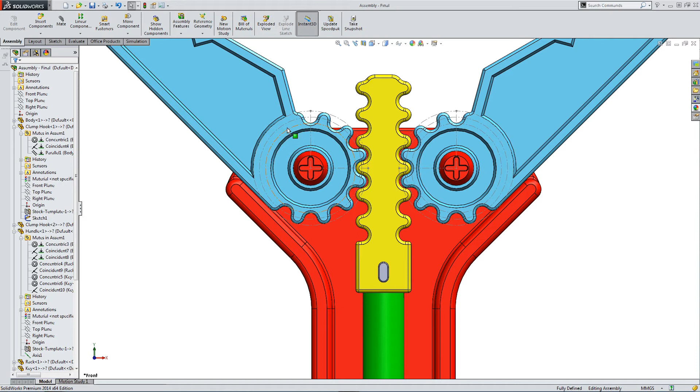On these clamp sections I've added some guideline sketches. These sketches are actually in the individual parts, so let's have a look. Here is my clamp part and here is my sketch.

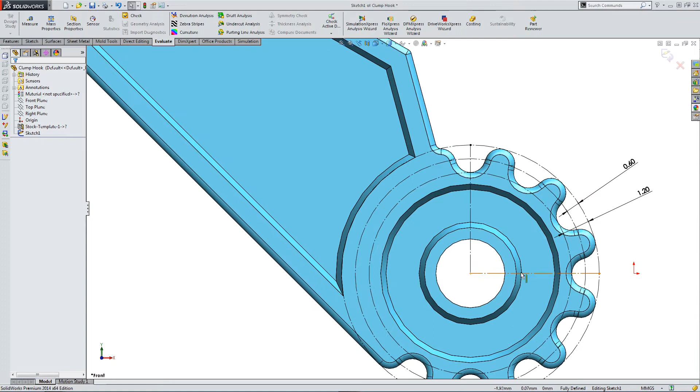I have a tooth profile and I want to track it, so I've aligned circles to the inner and outer section of the tooth profile, and tracked the mid-plane. Now it's the middle circle I'm interested in, because I'm going to put together a rack and pinion mate. The middle circle is 10 millimeters in diameter.

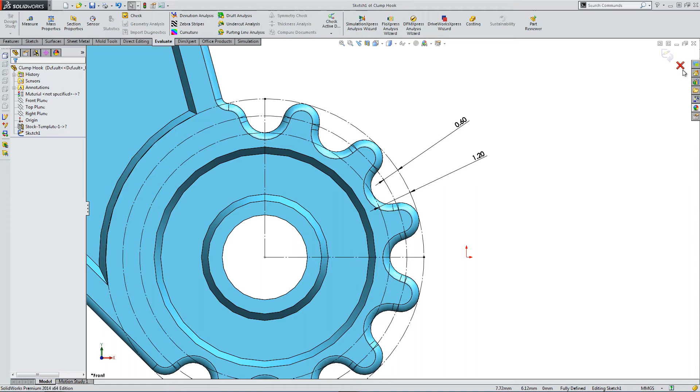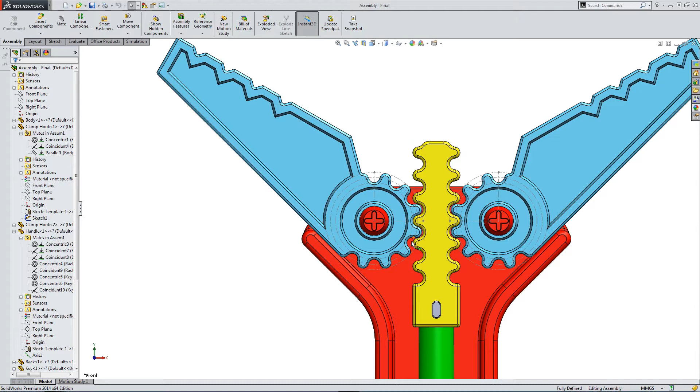I'd like to put together this rack and pinion mate, but before I do so I need to turn off one of my other existing mates. As previously said, all the parts are fully constrained, so I need to deactivate one of these three constraints. In the clamp hook I need to get rid of the parallel body mate.

This is just matching the cog to its hard stop position. I need to do this for both hooks, so let's turn the parallel mate off for the other hook as well. Okay, so now both are movable.

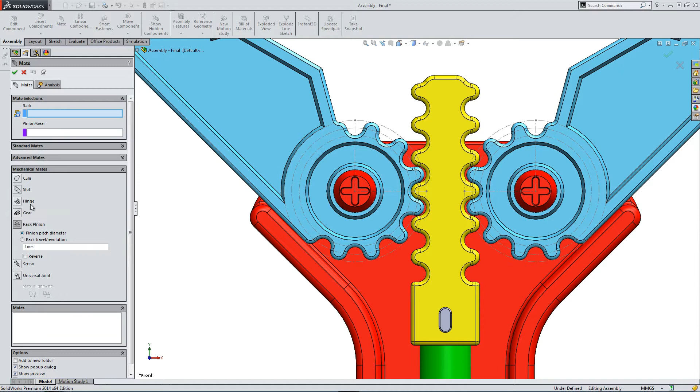Let's replace this with a rack and pinion mate. We're going into mechanical mates, then rack and pinion, and we need to select a rack and a pinion. For the rack, I'm just going to pick this line, this edge from my rack.

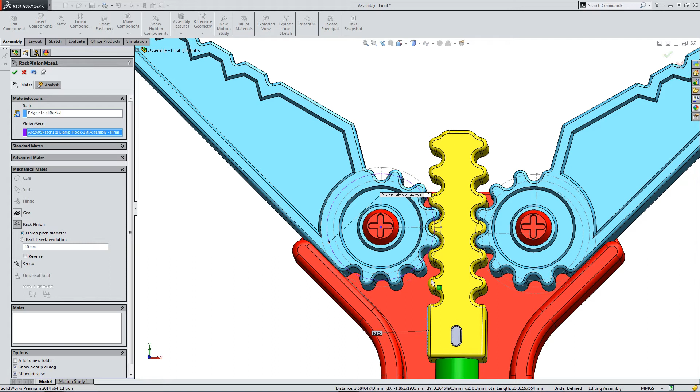Now for the gear, it's very important that I select that middle circle, the 10 millimeter diameter circle, because the tooth profile from both parts are matched together, and it's this circle that guides the pitch. So let's accept this.

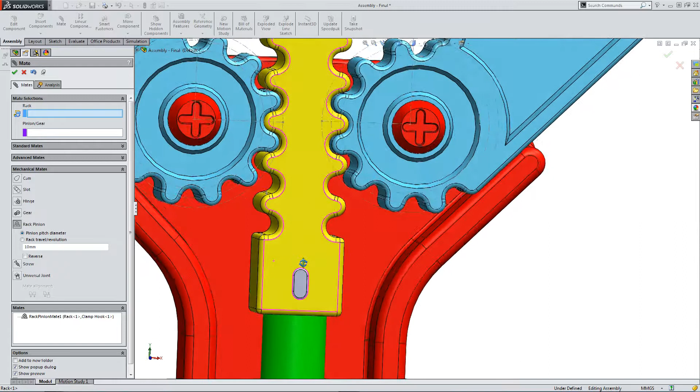I need to do it again for the other side. I'm unsure at the moment whether I need to select the same line, but for trial and error purposes I'm just going to select the opposite, and then select the same circle. This may or may not work when we come to animate it later on. We'll find out, but we can easily trial it and then modify the mate if it doesn't quite work out.

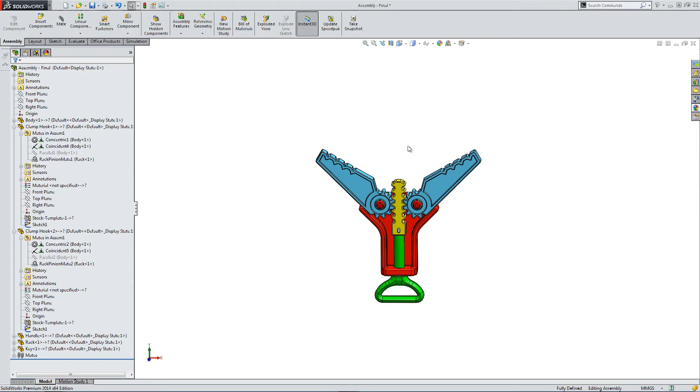Okay, so I now need to have a look at my front plane. I constrained my body to the front plane before. So if I do a section view by the front plane, I can see that it intersects perfectly through the diameter of the handle.

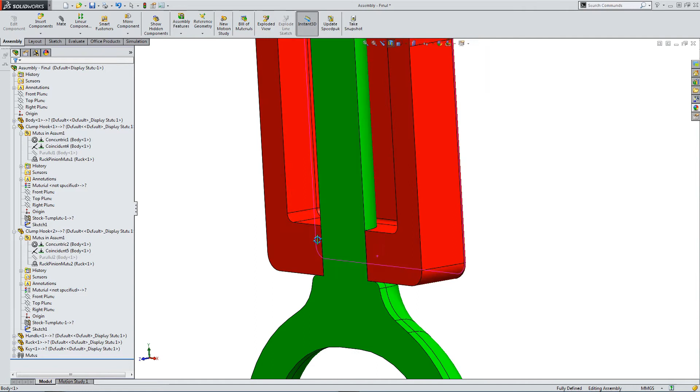I did this on purpose because I now want to create a spring on this plane. This is going to be an interactive spring that works within this assembly, so I don't want to start a sketch. What I want to do is insert a new part.

So let's go Assembly, Insert Components, New Part, and a part will have appeared. See, Part 1 - let's rename it Spring. Now I want to edit this part because I want to add some function to it.

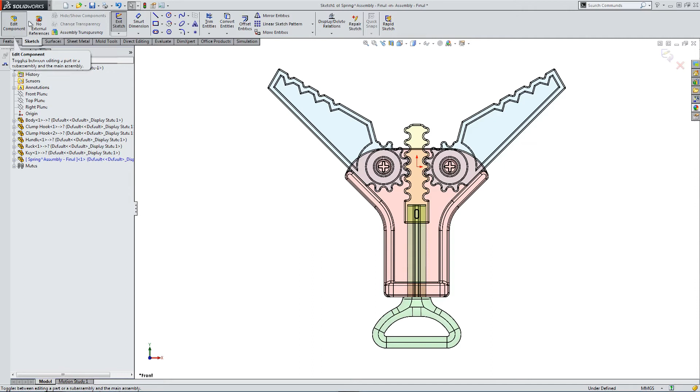I'm going to draw on the front plane within the assembly. Let's bring up an axis to work with. So what I'm doing here is modeling my part, which I would usually do externally, within the actual assembly file, because there's geometry that I want to track in the assembly file.

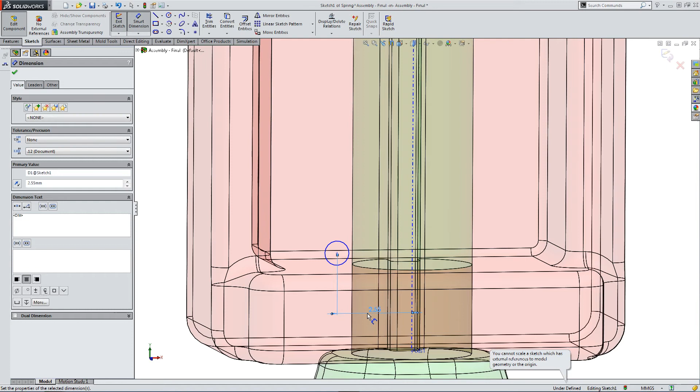Let's just add some constraints for a sketch. I'm going to basically put together the profile for the spring, so this is going to be the start point for the spring. It'll become a little clearer pretty soon why I'm mapping it out like this.

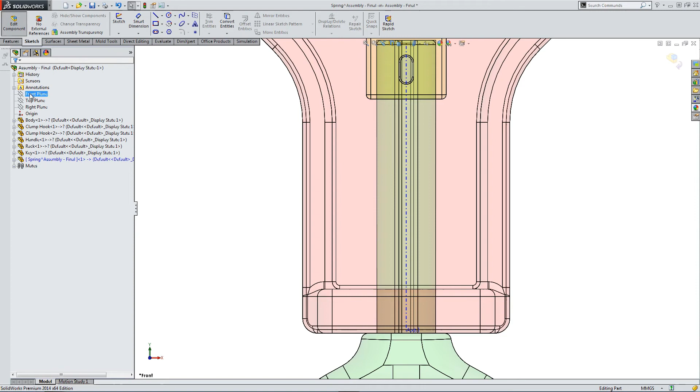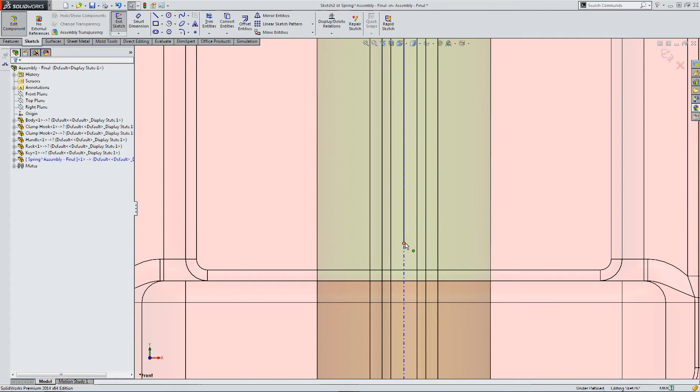That's going to be my wire diameter, and now I need to wrap it around an axis, but unfortunately I need to draw an axis in another sketch. So back on the front plane, I'm going to sketch again and snap to this axis - that's where I want it to be, and fully constrain it to the base, which is the start point of the spring.

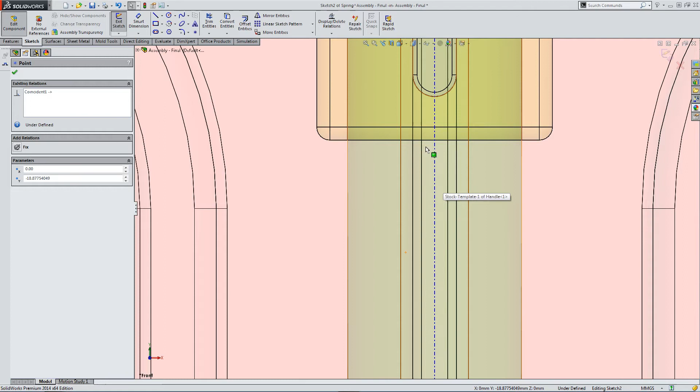I don't quite want to match it to the end point of the spring up here, but I'm going to anyway, just to show you what happens to the spring if I do match it to that line. What I actually want is to offset it, but it doesn't make sense at the moment.

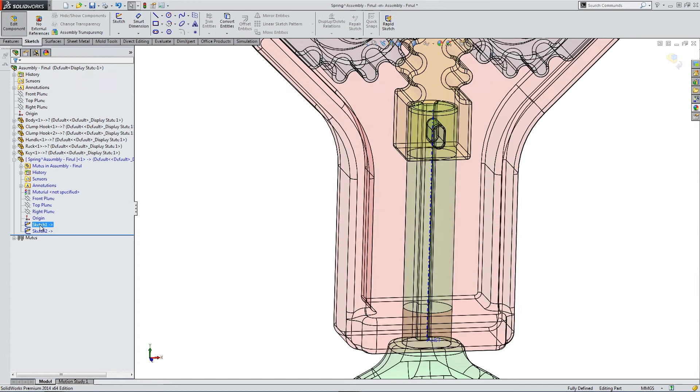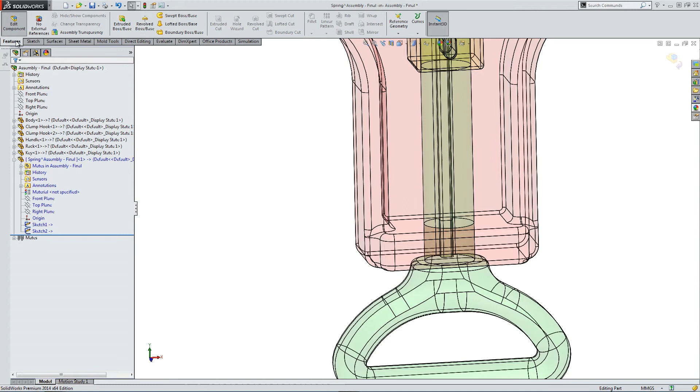Okay, let's go into features - we've got our two sketches. So let's go features, and we're going to go swept boss base.

Then we need to select a profile and a path, and we've just drawn both of these. So here's our profile, and the secondary sketch here's our path. Now I want to travel the length of the path, so I need to modify.

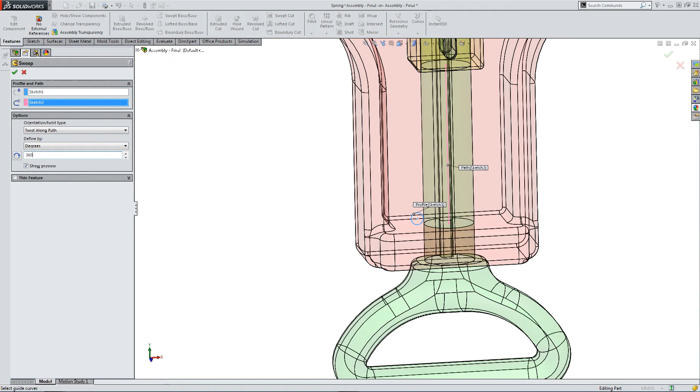It's probably not path alignment minimum twist, it's going to be follow the path. I need to change this, and twist along the path. So I'm going to travel up the path, but twist, and my spring is going to have 5 turns, so 360 degrees times 5 gives me 5 full turns.

So I've twisted along the path, and this creates my makeshift spring. But this isn't quite right at the moment - as you can see, it intersects, it goes straight through a solid body.

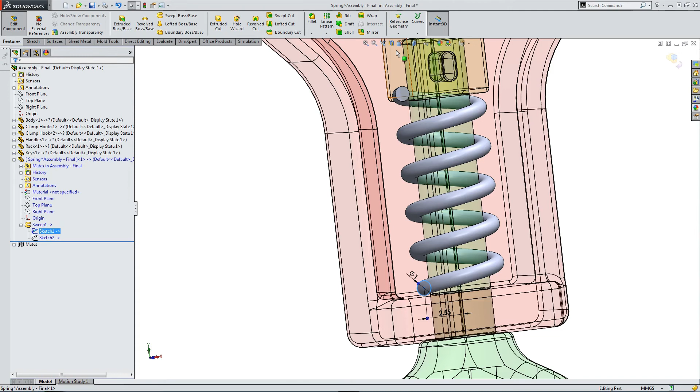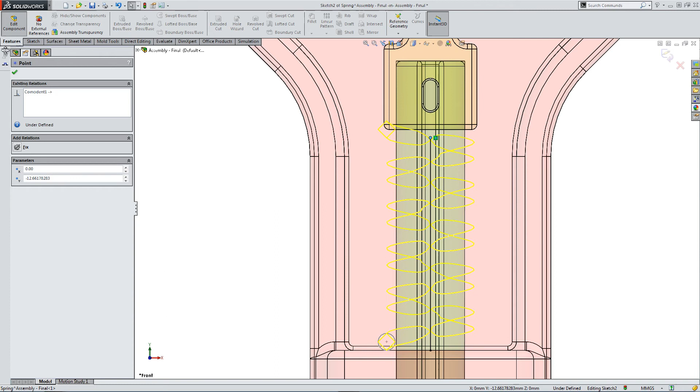We don't want to do this, so we can change the line we drew earlier for our center line, for our path. Let's modify this and offset the top of the line by the diameter of the wire. So let's delete this mate, bring it down. The dimension is going to be the diameter of the wire, which is 1 millimeter.

And then when we say OK, everything should match up. So here's my spring, my makeshift spring.

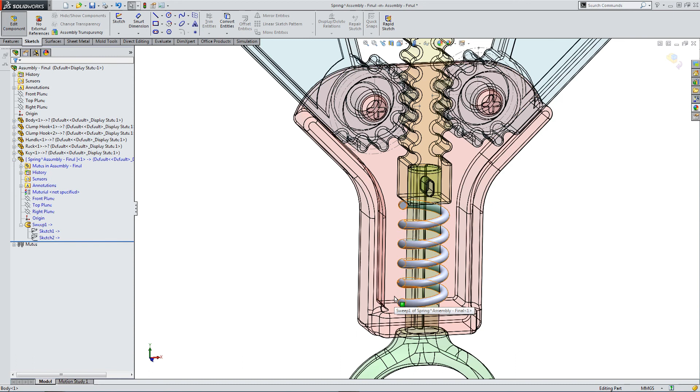Now, the spring, because it's modeled in Solidworks in the assembly and constrained to the assembly, should move with the assembly. So when we go into animate, we should find that the spring does move exactly as we want it to. Let's just save this before we finish.

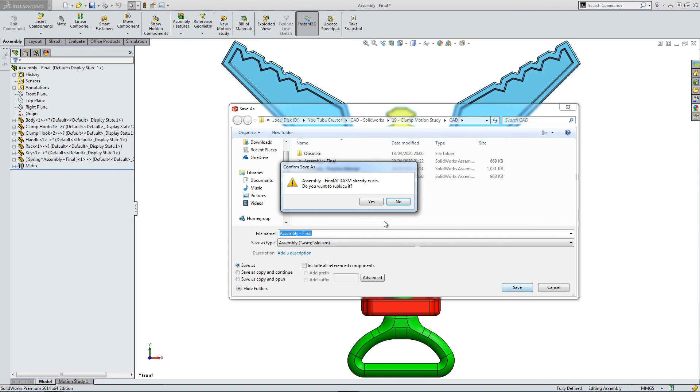This sets us up nicely to now go into our motion study. The spring is going to be saved internal - we're going to leave it internal. And in the next video, we'll look at how to animate.